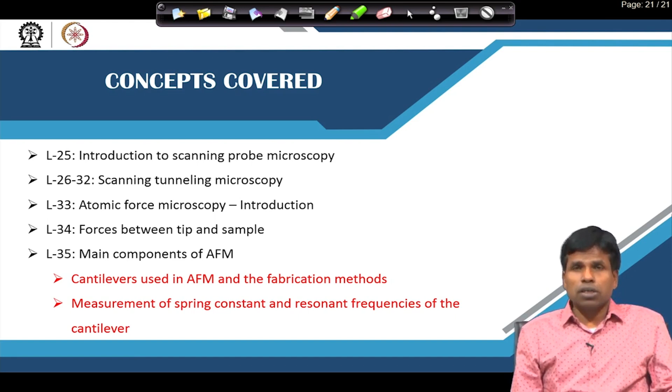So today we will discuss the main components of the AFM, particularly the cantilevers used in the atomic force microscope and its fabrication method. As we saw in the last class, spring constant plays an important role. To avoid snap to contact, we should have a higher spring constant, and its resonant frequency is also important. Therefore, the material chosen for making the cantilever is important, and the dimensions of the cantilever, along with the material, will play important roles on the spring constant value and resonant frequency achievable with a particular type of cantilever.

If we look at the main components of the AFM, without going much into electronics, just the main parts, at the heart we have a cantilever probe assembly. Here is a probe, and the probe is attached to a cantilever. Sometimes we say probe means probe plus cantilever in AFM. The cantilever and probe can be the same material, in many cases it is the same material, mostly silicon or silicon nitride, but it can also be a different material. When I say probe or cantilever, in these cases it is the same assembly, that is why I have written cantilever probe assembly.

Then there is the optical detection system, where we have a laser. A laser light falls on the back side of the cantilever, and therefore the back side of the cantilever is coated with a reflective coating, so that very high reflection of the laser beam occurs. The reflected beam then strikes a position sensitive detector, a photo detector. When the cantilever moves upward in the z direction, the reflection of the light also moves upward on the position sensitive detector, and then we can calculate how much the cantilever has moved up.

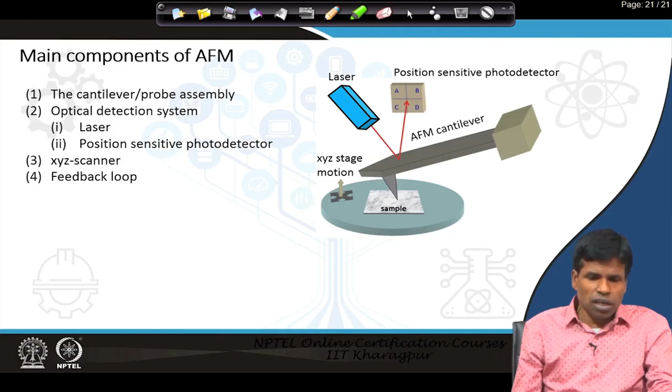Similarly, we have an XYZ scanner, and the sample certainly will move in different directions. The tip can be brought closer to the sample, or the sample can be taken upwards towards the tip. And then we have a feedback loop, which is a type of electronic system that controls everything, their positioning, movement, etc. So these are the four major parts in the AFM system, but the heart of the AFM is the cantilever probe assembly.

In the cantilever probe assembly, the cantilever is fixed on a silicon base, the holder, and the tip is located on the free end of the cantilever. Now the curvature of the AFM tip is in the range of 1 to 50 nanometers. The smaller the probe or the apex size, the better for resolution, no doubt. If we take an AFM probe with a finer tip, we can have better lateral resolution, and with current technology, we can now have tips of size less than 5 nanometers.

Second, the interaction force between the tip and surface is estimated by following simple Hooke's law, that the force is proportional to the displacement, through a constant which is the spring constant, or elastic constant for the cantilever, and del z is the displacement. The value of K, the spring constant, varies in the range of 0.001 to 10 Newton per meter depending upon the cantilever material and geometry.

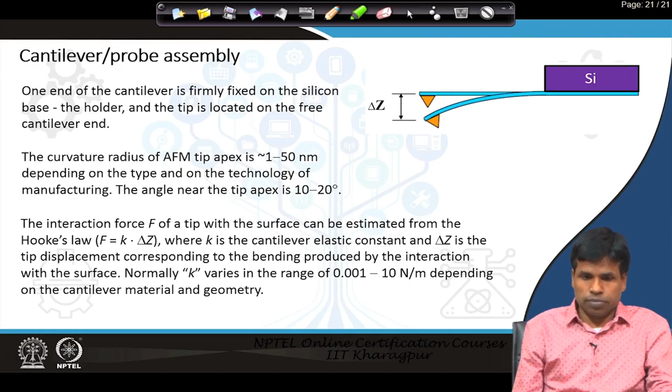So if we look at the requirements for the AFM cantilever, there are two major requirements for the cantilever to be used in the atomic force microscope. One is small spring constant. In the last lecture, I mentioned a larger K value helps prevent snap to contact, and here I am saying small spring constant - we will see why, what is good and what is not good. The second requirement is high resonance frequency, preferably greater than 10 kilohertz, and this is necessary for high scan speed.

So in order to understand why this requirement exists, we need to know how strong a force can be measured in the AFM, because in AFM we measure the force and that force is utilized for creating the image.

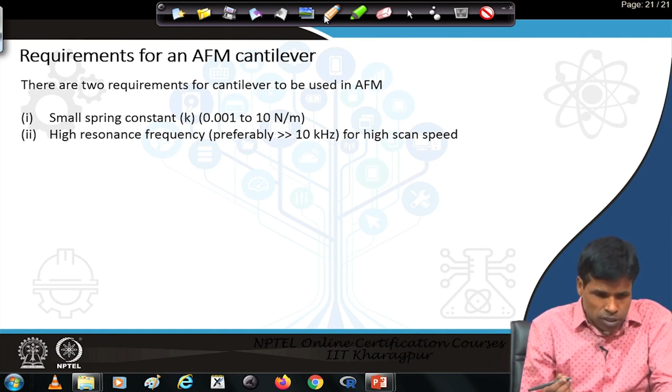To know how force can be measured in AFM, we first consider the force between two atoms in a solid. In a normal solid, two atoms vibrate with a vibrational frequency of around 10 to the power 13 hertz at normal temperature. So the vibration frequency of atoms in the solid is in the range of omega vibration equals 10 to the power 13 hertz.

And typical mass of the atom in a solid is in the order of 10 to the minus 25 kilogram.

If we consider atoms in a solid vibrate following a simple harmonic oscillator, we can write omega vibration equals square root of k by m, or k equals omega vibration squared times m. If we put these values, we find the force constant between atoms in a solid is coming in the range of approximately 10 Newton per meter.

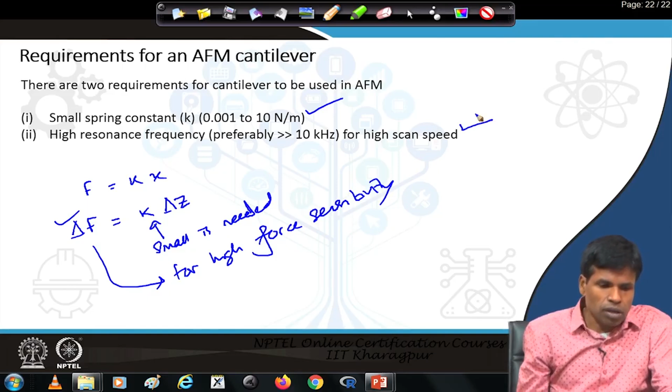The second requirement is high resonance frequency, preferably greater than 10 kilohertz, which is required for high scan speed. We shall see later that in AFM there is a static mode and a dynamic mode. In dynamic mode, the tip or cantilever will be oscillating.

The signal is proportional to omega naught divided by k. So the signal will be stronger if the resonating frequency is greater, and also if the spring constant k value is smaller.

And if you remember, another advantage of having a high resonant frequency of the cantilever is that it can become immune to external vibration. If we have a higher resonant frequency of the cantilever or the system, then it will be immune to external vibration. We have seen that in STM, when omega STM is high, it is preferred for getting rid of external vibration. Similarly here also, having a higher resonant frequency will immune the system from external vibration to a great extent.

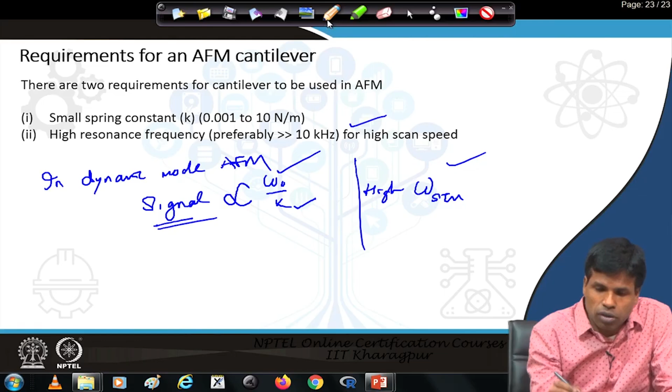So in that regard, as per the basic harmonic oscillator equation, we have seen that a small spring constant is good and a high resonant frequency is good. Considering the basic equation of a harmonic oscillator, omega cantilever is nothing but root over of k by m. What we see here is that achieving these two requirements is not an easy task, because if we have a small k value, then our omega cantilever will be small. So if we want to reduce the spring constant, our resonant frequency is going down. Similarly, if we want more resonant frequency, the spring constant will be more. So fulfilling these two criteria at the same time is difficult.

But it can be done if we have a smaller m value, m being the mass of the cantilever. If we have a smaller mass of the cantilever, then we can reasonably control this, having a smaller spring constant with a reasonably high resonant frequency.

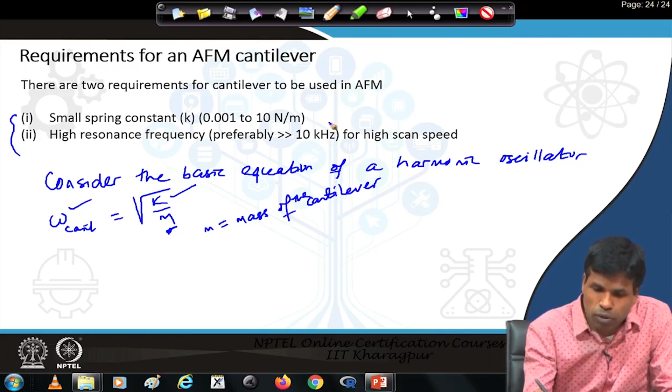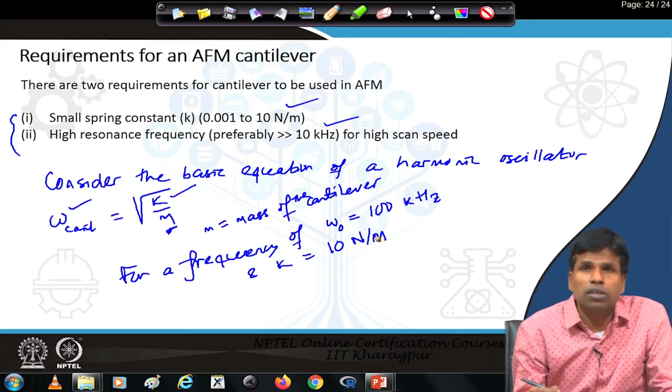If for example our resonant frequency needs to be greater than 10 kilohertz, and let us say small spring constant we need 10 Newton per meter, for a frequency of omega naught equal to, let us say, 100 kilohertz and spring constant of 10 Newton per meter, then m needs to be 1 microgram. So a cantilever of 1 microgram, or a very small mass, would fulfill this desired criteria. This way we can achieve the requirements to study the sample using AFM.

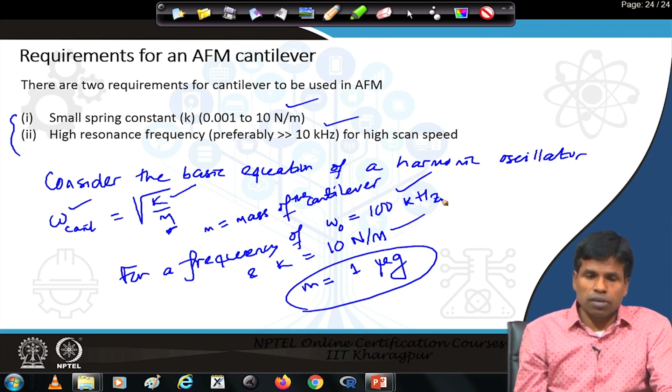Now, how are these AFM probes fabricated or produced? Normally two types of probes are used: one is rectangular cantilever and one is triangular cantilever. They are made up of either silicon or Si3N4, silicon nitride. The probe shape can be of any size, and these cantilevers are of length around hundreds of micrometers. Cantilever lengths are hundreds of microns in length, tens of microns in width, and a few microns in thickness. This thickness is very small, and these dimensions play important roles in the stiffness, spring constant, and other values of the cantilever.

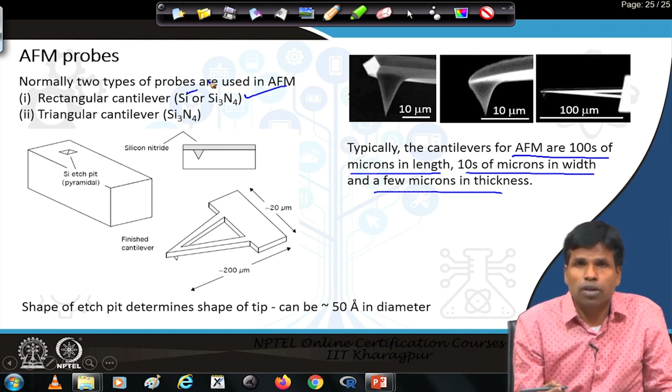The technology of the microelectronics industry or silicon technology industry is utilized to fabricate the tips or probes for the atomic force microscope. The tip can also be generated by forming a silicon substrate having a pit, and then silicon nitride Si3N4 is deposited by chemical vapor deposition technique. Once it is deposited, the silicon can be etched away. Once etched away, we end up with a silicon nitride cantilever and probe. By controlling the thickness of the Si3N4, we can control the thickness, normally a few microns, the length, the tip height, aspect ratio, and the type of tip, either conical or pyramidal or any other shape, can be produced by this process.

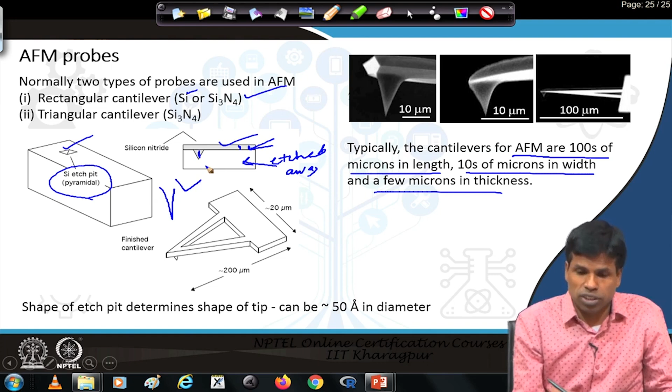The tip shape can also have significant effects on the measurements. There are two types of tips: a conical tip with a high aspect ratio, and a pyramidal tip with a low aspect ratio. These have an important role in the performance of the atomic force microscope. Because of having a high aspect ratio, the conical tip can come downward closer to the sample, and because the thickness of the tip is small, it gives better resolution compared to a pyramidal tip, which cannot come very close to the features of the sample, so its resolution is poor.

Similarly, if the tip shape is a double tip, then it will always be measuring two forces at the same place. Even if the object is one, because of two tips, we measure two forces, and therefore the features look doubled, single features appear as double. This is due to artifacts, which we discussed a little earlier while discussing the scanning tunneling microscope.

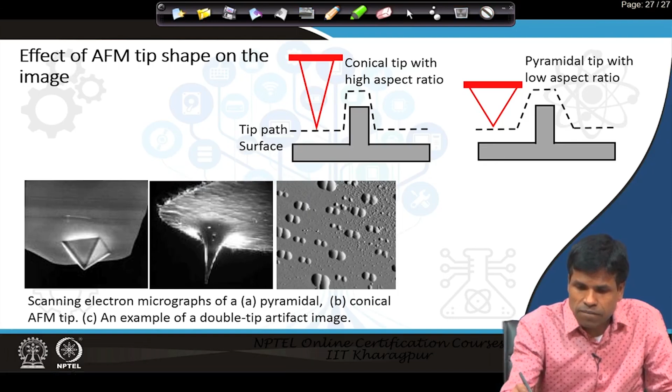Now let us discuss fabrication of cantilever, how a cantilever is fabricated. Mostly, as we have seen, the cantilevers are made with Si silicon or silicon nitride, and the semiconductor microfabrication technology is utilized to fabricate the cantilever probes. A particular thickness can be chosen, then Si3N4 can be deposited by CVD, and the rest of the silicon can be etched away to get a Si3N4 cantilever.

The cantilever can be made from a single material, Si, and that would avoid the strain due to thermal mismatch of different materials bonded together in the thin film cantilever. As mentioned, Si3N4 is deposited on silicon substrates by CVD method at a higher temperature, so there will be a thermal mismatch creating stress in Si3N4, and that stress can cause problems at a later stage. Therefore, using a single material could avoid the strain due to thermal mismatch of two different materials when thin film technology is used to fabricate the cantilever.

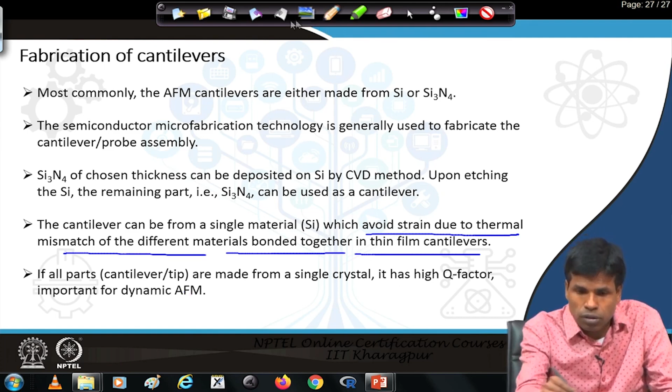So how is this cantilever probe assembly fabricated? It is started with, let us say, a silicon substrate. It is told that this is done through anisotropic etching. Anisotropic means not isotropic, the etching rate is different for different planes of silicon. In this particular case, a 100 oriented silicon wafer was chosen first, and then selectively SiO2 is deposited at certain places. This is done by lithography.

So what you can do is first deposit SiO2, or the silicon can be thermally annealed at high temperature, or wet oxidation can be done, so that both sides of the silicon can have SiO2. Once a complete SiO2 layer is formed, then some region can be covered by a suitable resist material. After covering the suitable resist material, the rest of the SiO2 can be etched away.

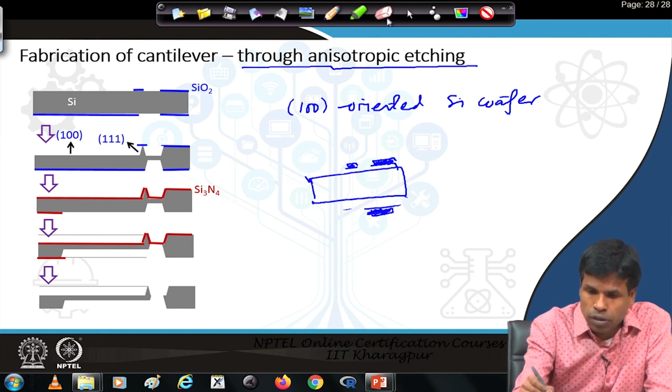Or, it can be done in the opposite way. You can take a silicon piece, then coat with SiO2, either by thermal oxidation or by wet oxidation. After a continuous layer is formed, then one can coat a resist material over it. After coating the resist material, some region can be removed and other regions need not be removed.

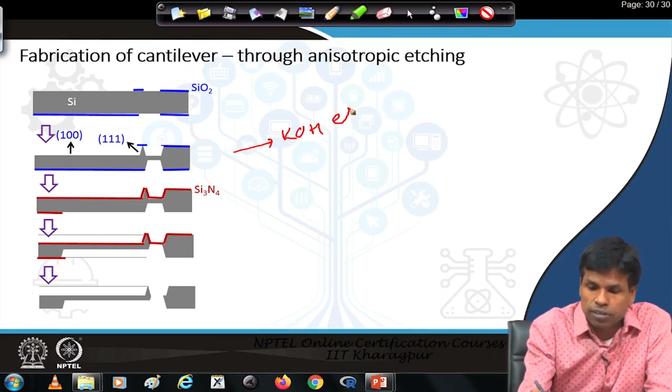In this particular case, three different regions are removed of SiO2. So now it is put into a KOH solution, KOH being the etchant. Once put into the KOH solution, wherever it sees the silicon, it will etch it away, but it cannot etch away the SiO2. But again, this is anisotropic etching.

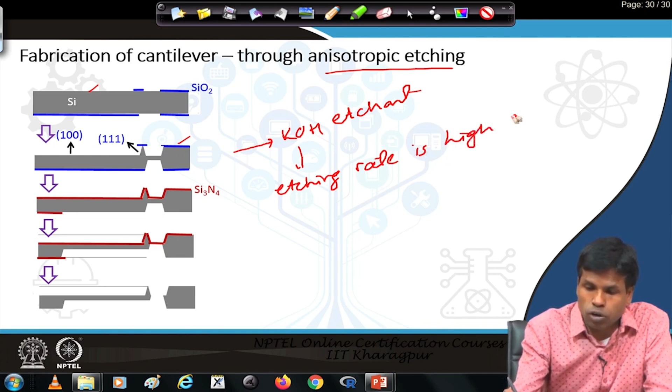So the etching rate is high on the 100 plane but low on the 111 plane. As etching rate is high on the 100 plane, etching will be faster in that orientation, but the etching rate will be smaller on the 111 plane. Therefore, it produces facets of 111, as you see here, wherever these sides are producing facets.

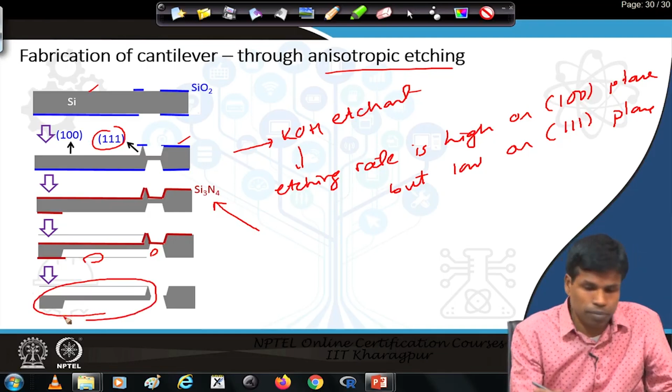Once it is etched away, a protective layer of Si3N4 can be coated selectively. After putting this protective layer, further etching can be done in this region. By further removing the Si3N4 layer, one can complete the fabrication of a silicon cantilever.

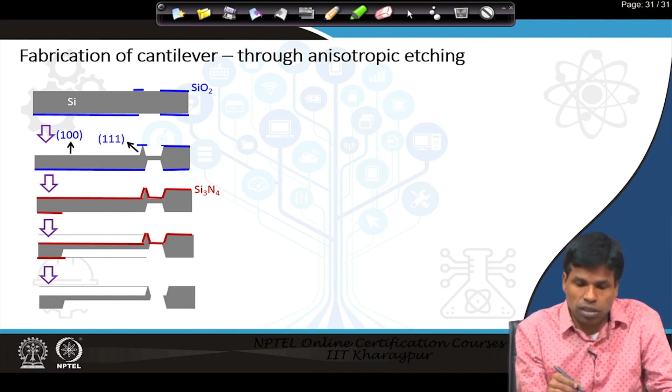It is done through anisotropic etching, and in this way one can control the length, width, thickness of the cantilever, and also the tip shape, by using this lithography and etching technique.

Regarding the characteristics of an AFM probe, mostly in almost all cases Si3N4 silicon nitride and silicon are used as cantilever probes in the atomic force microscope. Silicon nitride has a smaller spring constant, less than 1 Newton per meter, while silicon has a high spring constant. So, as per the simple harmonic oscillator formula, when spring constant is high, resonant frequency will be high, and where spring constant is low, resonant frequency will be low.

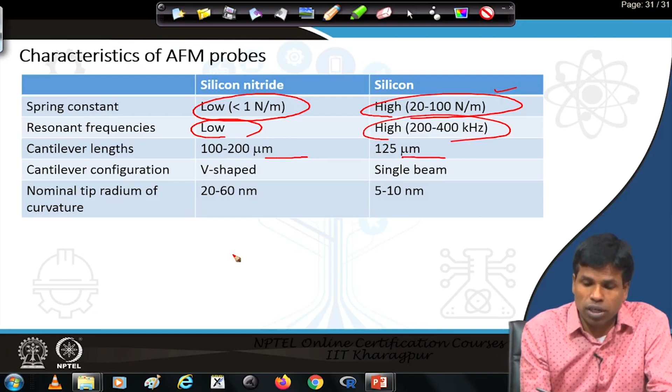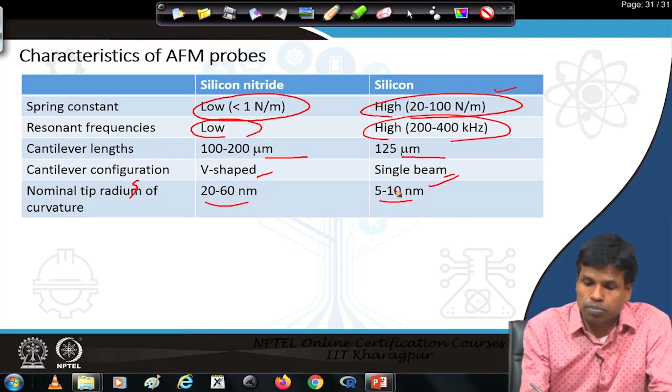Cantilever lengths can be of any length one desires. Cantilever configuration can be V-shaped or a single beam. For the tip radius of curvature, in case of silicon nitride it is normally 20 to 60, or 20 to 50 nanometers. With silicon, we can have a much smaller tip because it is made from a single material with no second deposition, therefore the tip shape is normally smaller with silicon.

One can calculate the spring constant from the geometry of the cantilever. This is the formula for estimating the spring constant using material constant and dimension. Here E is the Young's modulus, W is the width, L is the length, and T is the thickness. Using this material constant and dimension, one can calculate the spring constant, and if we want a particular spring constant value, the dimension can be varied accordingly.

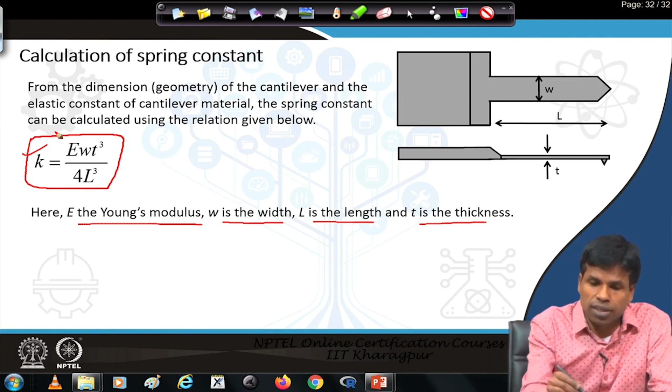There are other ways to calculate the spring constant. One can calculate it by the thermal noise method. The thermal noise of an ideal oscillator is related to the spring constant by this equation, where K is the spring constant and del Z thermal is the mean square of thermal amplitude fluctuation of the oscillator. One can measure the oscillator amplitude, meaning the displacement of the free cantilever, under a particular temperature at a high temperature, and from that one can measure the spring constant. Spring constant can be calculated by the thermal method.

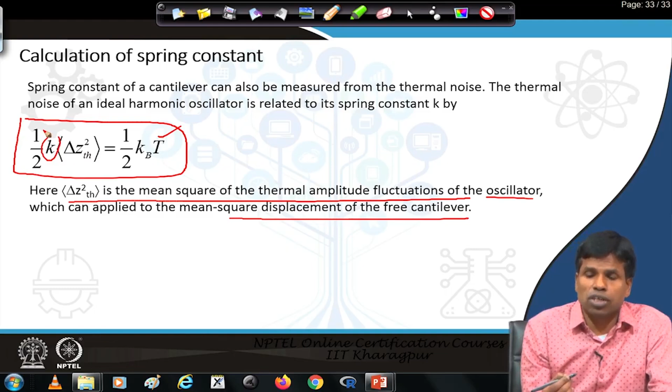There are other methods also available to calculate the spring constant, which I am not discussing here, but these are a couple of methods which are quite easy and quite extensively used to estimate the spring constant of the cantilever.

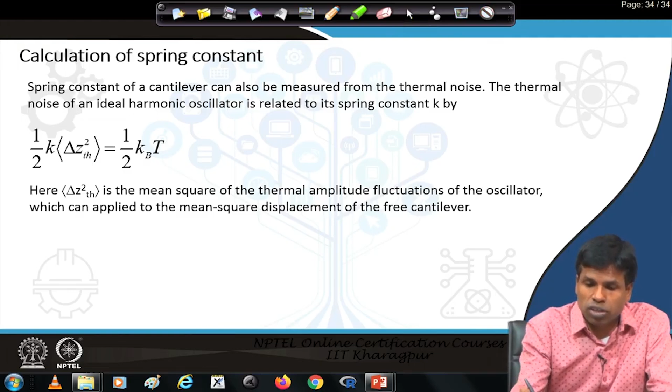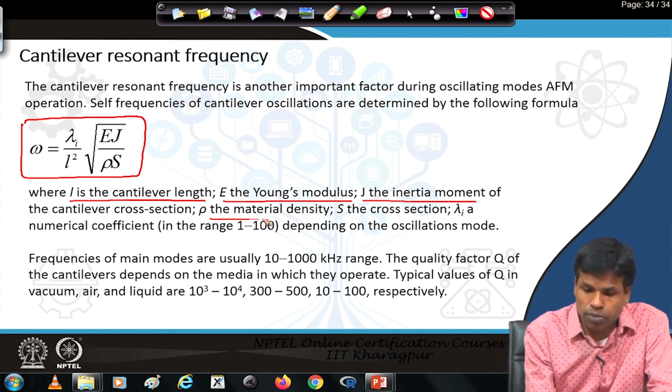Another factor which is more important is the cantilever resonant frequency. This can be calculated using this equation, where all the values are given here. L is the length of the cantilever, E is Young's modulus, J is the moment of inertia of the cantilever cross section, rho is the material density, S is the cross section, and lambda is a numerical coefficient in the range of 1 to 100 depending upon the oscillation mode.

The cantilever oscillation can be of different modes, and the values vary from 1 to 100. This resonant frequency is normally in the 10 to 1000 kilohertz range, and it also depends on the quality factor. The resonance frequency also depends on which medium the operation is performed in, because the medium will also have a role in the quality factor of the materials.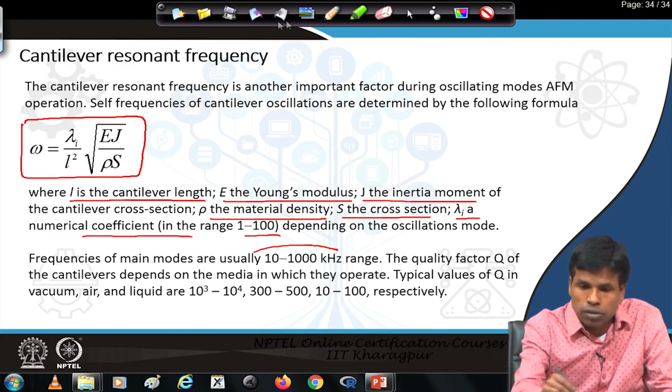In conclusion, a cantilever with a small spring constant gives high sensitivity, because of the formula del F is equal to K del Z. So a cantilever with a smaller K value can give us high del F sensitivity, and a cantilever with high resonance frequency is preferred for fast scanning in addition to high immunity to external vibration.

In order to have faster scanning on the surface, a higher resonant frequency is needed, and our tip or probe should not touch the sample. If it touches, we cannot scan fast. So for faster scanning, the tip has to be away from the sample. But when the tip is away, if it is too far, the force of interaction will be small.

If the tip is too close, snap to contact may occur. If snap to contact occurs, it is nothing but contact mode, and in contact mode we cannot have fast scanning. In order to avoid this snap to contact mode, we need to keep the tip a little away, but within the measurable force regime, with a higher oscillation amplitude.